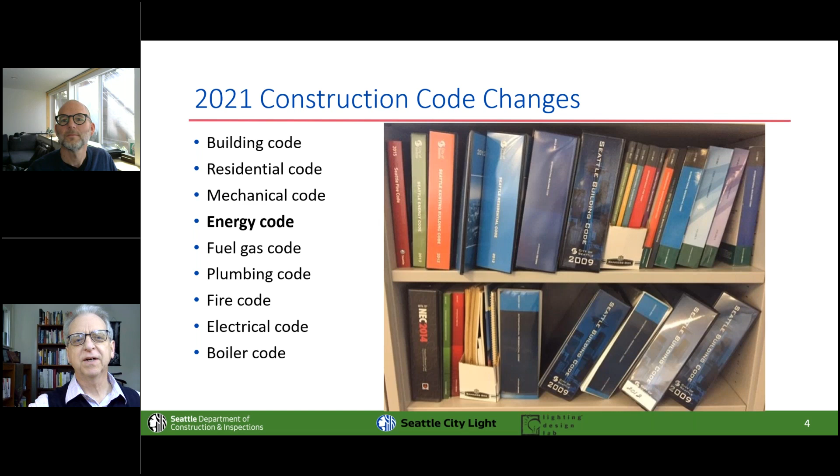Note that this is one of a whole raft of codes for any of you on the call who might be newbies. The energy code's just one of them, and somehow everybody's got to wrestle all these for every project that you do, so let us know if you got ideas about how these all interact.

Just to be clear, we're calling this 2021 - we're perfectly aware that this is 2023. It's the 2021 IECC nationally that this is built on. Then the last couple of years, Washington State spent pulling together its changes. We have like 200 amendments or something like that. We make all but one, I think, which is to make it more stringent.

And then once that's finalized, Seattle picks up and does some more things. We often lead the rest of the state. So things that are in the new Seattle code are likely to find their way into the state and eventually national codes.

The July 1st is the date for everything outside of Seattle. Inside of Seattle, we had been expecting to get to July 1st right up until about 2 weeks ago. Then since it's Seattle and since we can't help but review things to death, we're doing more internal reviews and talking to more stakeholders right now, and so we bumped this to October something. They've just, as specific as they got was no sooner than October 2nd. Part of that just has to do with getting back onto the city council's calendar.

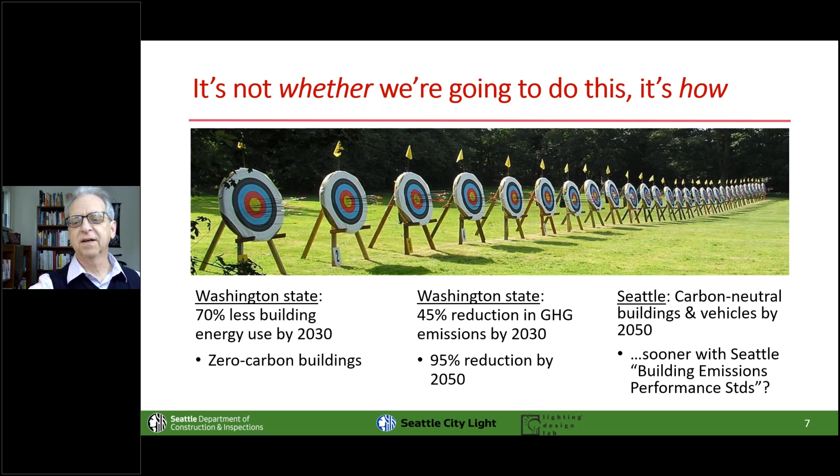The big thing in the lower right there, which we're still working on, is the details for the building emissions performance standards, which will layer on top of the state building performance standards, but being focused on carbon emissions instead of just energy use.

You've also seen this slide, the big four directions we're taking in the development of the Seattle Code today, number one being that the building envelope of any building you're designing now is going to last longer than anybody on the call is going to be alive. We're supposed to be a carbon neutral city in 2050, which might be getting moved up even earlier. So we have to build building envelopes during the 2020s that won't require any major surgery to work in that carbon neutral Seattle.

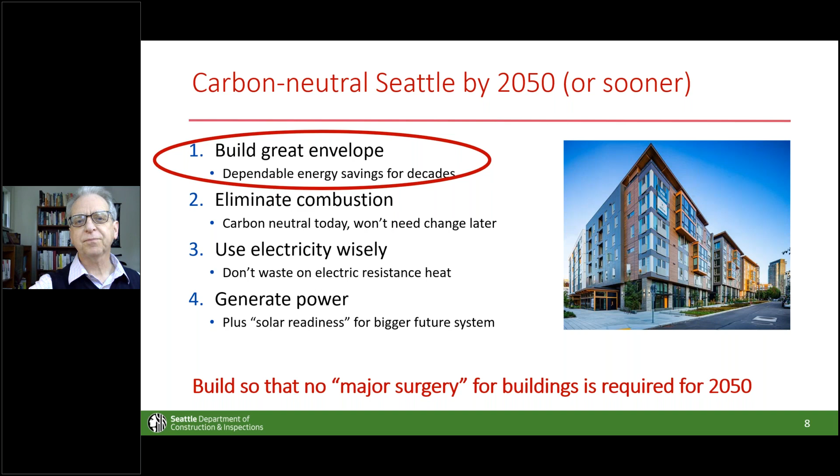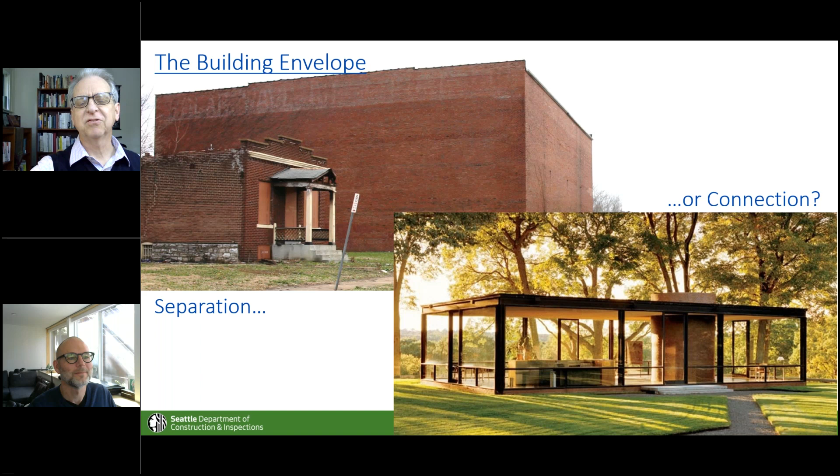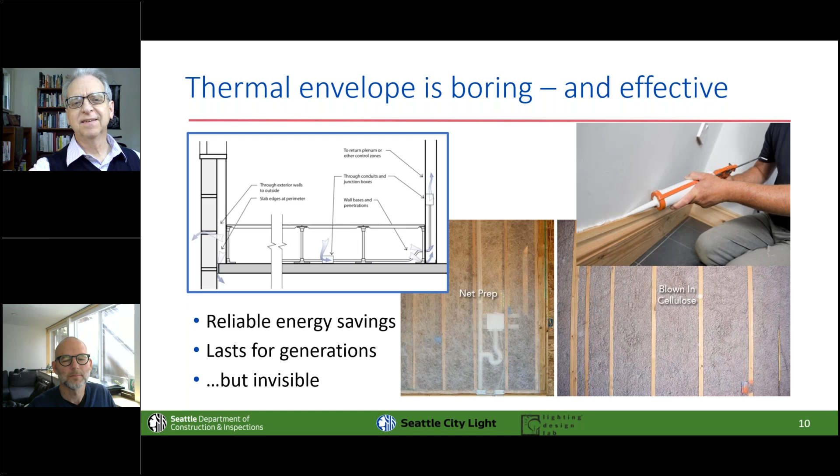We still have a number of high rises downtown from the late 50s and early 60s that are still single glazed, unbroken aluminum curtain wall, and it's been a long time since those went up - it's going to be at least that long that your current envelopes are going to last. It's mostly about how much glazing you have and how it's treated.

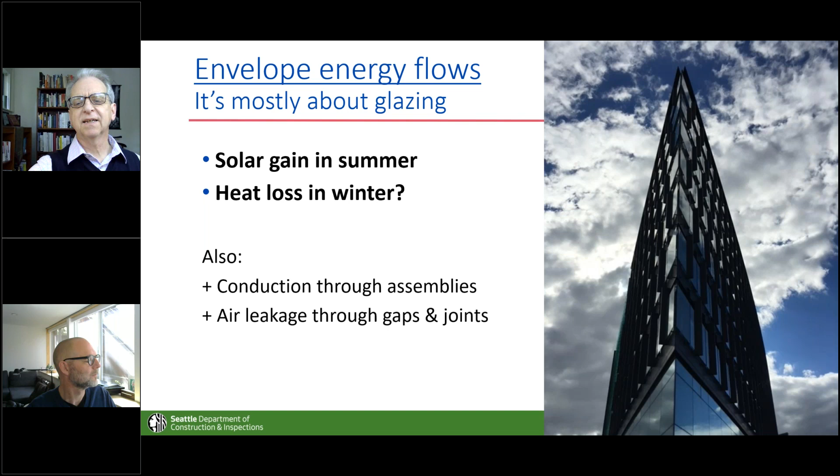Sun coming in and overheating in the summer has got to be dealt with for energy use, and obviously heat loss all winter, and really a lot of our spring and fall as well. Air leakage and conduction are also issues, but really everything gets dominated by glass.

Like I said, our buildings are going to be around for a long time, and so not only make them thermally great, but please make them look good.

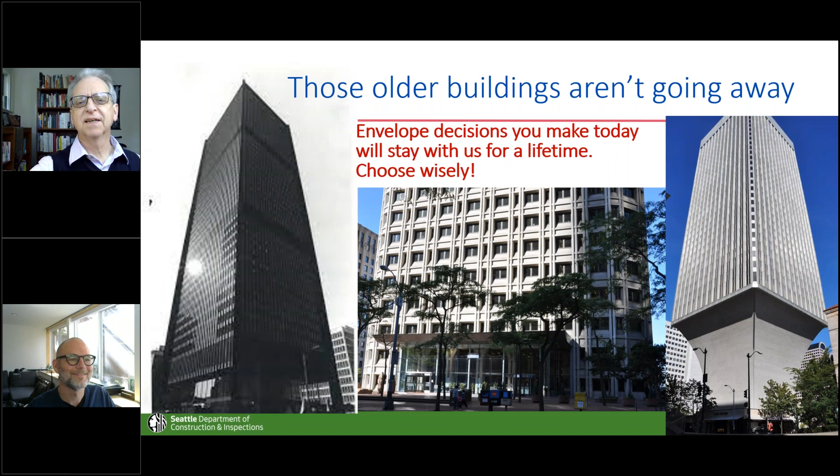We've had now four entire generations of architecture professors drooling over that image on the left from 1922, that all-glass see-through building, and a lot of my architect colleagues just can't get over it. But it might be time to get over it and still find a way to make a stylish building. It's funny that people doing all-glass towers think of themselves as being creative.

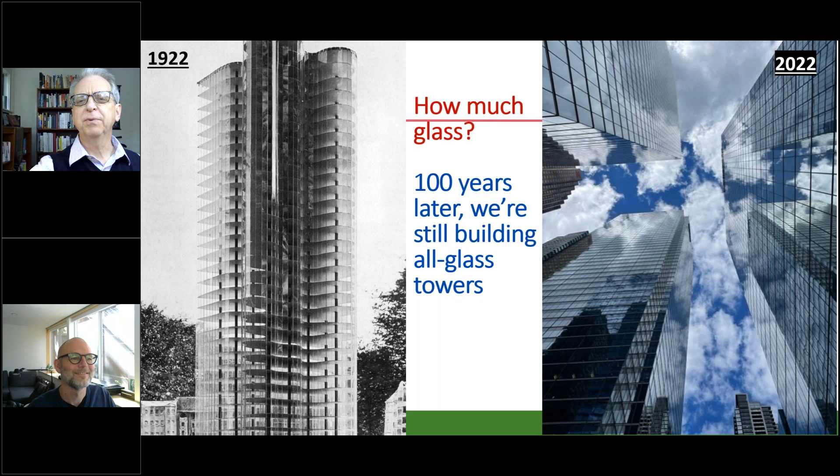By the way, I'm Nick McDaniel. I'm an architect at NBBJ, and I've been fighting or arguing with Duane about energy and architecture for a little over 20 years. So we've got a long history of talking through these issues.

One of the things we're really finding at NBBJ is that the sense of beauty has really moved on from those all-glass buildings. More and more the buildings that we're celebrating and finding celebrated in the architectural community are buildings that aren't all glass, and buildings that express their performance as well. I just put several of the recent NBBJ projects that really celebrate something other than glass, from the thermal TC at Microsoft to Samsung's headquarters to REI's headquarters. These are all projects that really express their performance in the skin. So it's the new beautiful.

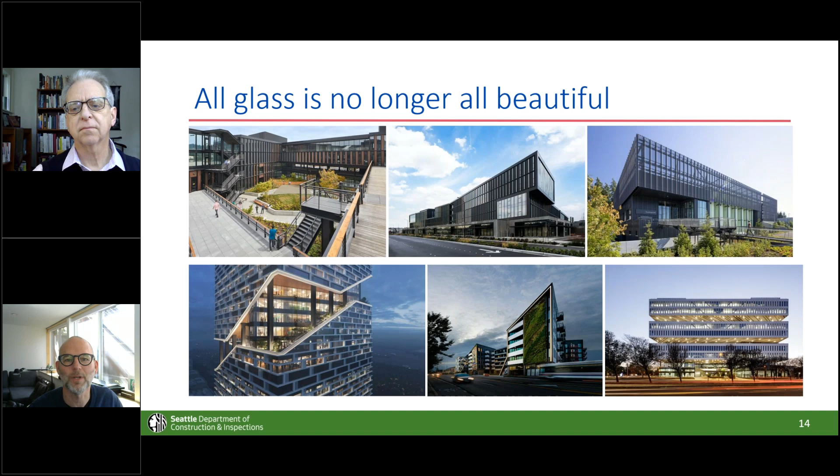This all begs the question: where are we going with this? How good of an envelope is going to be good enough for the long run, and for Seattle to basically be teaching the rest of the country and sometimes the rest of the world how to do it. There's several options I list for how we would come up with this conclusion about how good is good enough.

Is it a cost effectiveness thing? Thermal balance points in the past have been the point at which you have to start heating the building. It's been up around 60 in the past with some of our crummier buildings. It's getting down below 50 now, but we might push further. It's an unanswered question we have to ask about. You could always make a better envelope. Are we going to buy into the whole passive house thing, or is there somewhere else that's going to be more effective?

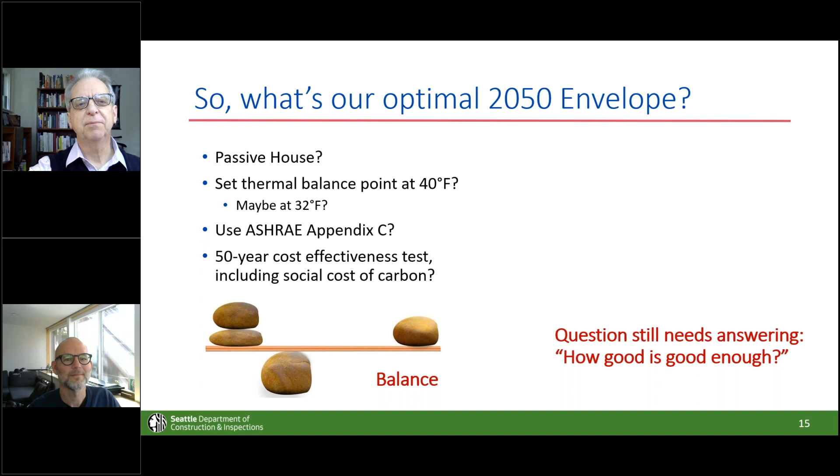Here's my reorganization of Nick's slide. That's awesome, so people can actually read it.

Duane asked me to quickly talk through how we do UA calcs. What's been interesting is the entire time I've been at NBBJ, every year somebody comes up with a better way that's supposed to work to do UA calcs, but we've never been able to figure out a better way. We have to go through the entire building, face by face, surface by surface, through all the plans and elevations, draw the UA for each one, reach out to someone like Arup to calculate the assembly values, and then go through Duane's Excel spreadsheet to figure it all out. It's incredibly time intensive and difficult, and more projects are moving away from it toward meeting the prescriptive calcs instead, as a real way to save money and time.

Nick, what is that little thing in the upper left? Oh, that's a crazy plan - an example of how crazy the plans get as you try to figure out all the different layers in a building and what the different assemblies are as you move through it. It's a real effort, very painful and time consuming, and of course the design changes, and then you do it all over again.

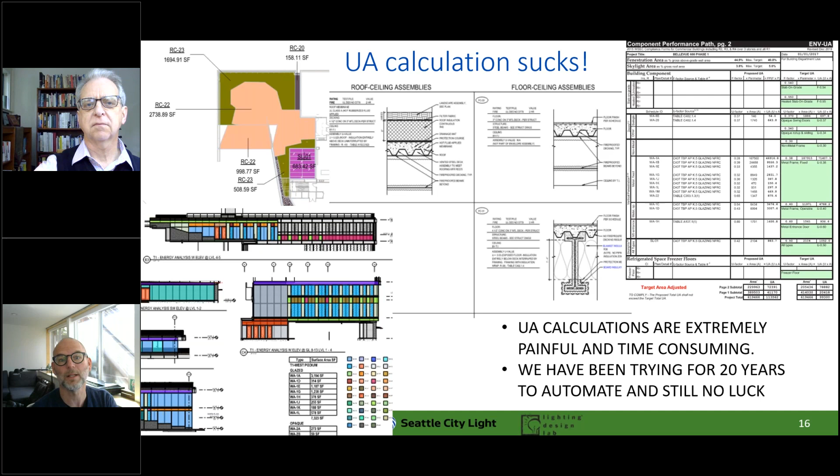You can get an idea - you can see how many assemblies, each color in that bottom chart represents a different assembly on the building. It's really difficult, especially on bigger buildings, and is an enormous time sink in a lot of ways. Well, I'm always happy to waste time.

Getting into the code itself, the maximum allowable area for the state code is the same as always - at baseline code it's just a straight 30%. In Seattle, it was suggested, and we finally bought into this, that we use a variation of the ASHRAE chart with a different target glazing percentage for each building type. So it's different, and you have to look them up in the table.

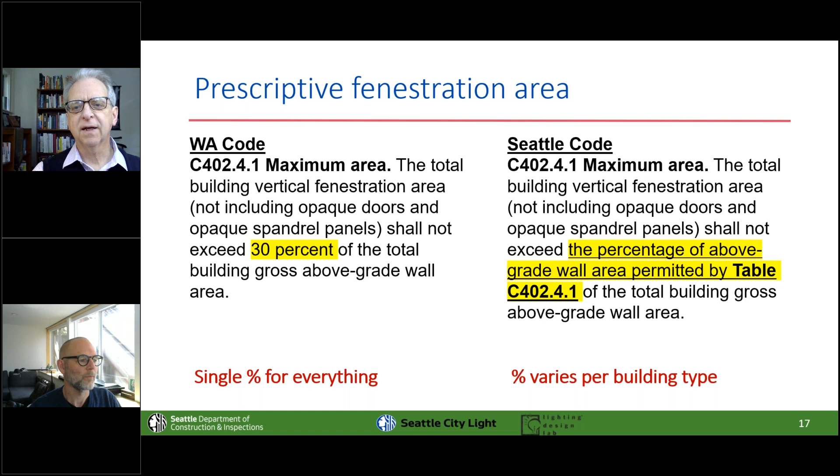There's the table - I highlighted schools there, so that would be 26%. This is after some long back and forth with school design people, who said the ASHRAE chart shows 22%, based on a survey of a lot of schools that was kind of an average. But they said, given the importance of daylighting, it should be 30%. So we settled it halfway. Some of these highlighted in yellow are higher than what's allowed by the ASHRAE standard, and we'll go with those. So just beware if you're an energy modeler that this list is not the one for energy modeling.

With Seattle, you're going to find out in a minute that we require a small percentage of your glazing to be triple or equivalent U-value glazing. You can have, for different building types and occupancy types, different allowable glazing percentages.

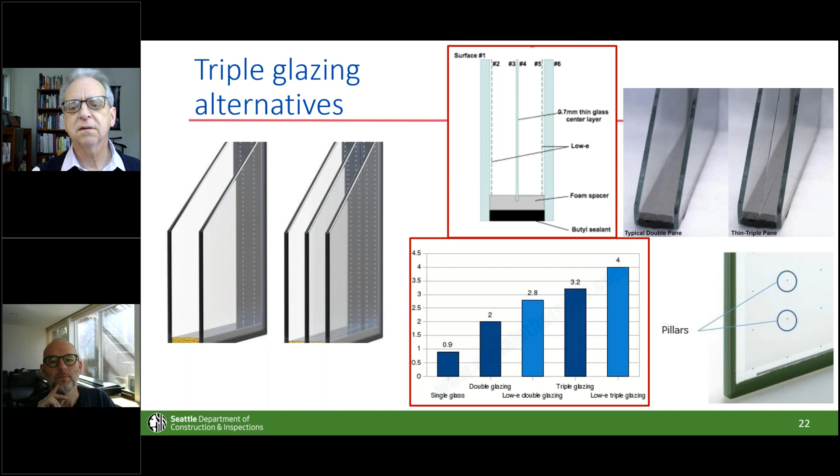So for mixed use buildings, each section of the building would follow its own path. You're talking about, say, you got retail on the bottom, and then you got some office floors and a hotel on the top or whatever. Each sector would follow its own, and if it's a smallish usage - say you have healthcare with a small retail in it or something like that - then the whole floor would just follow the main occupancy type.

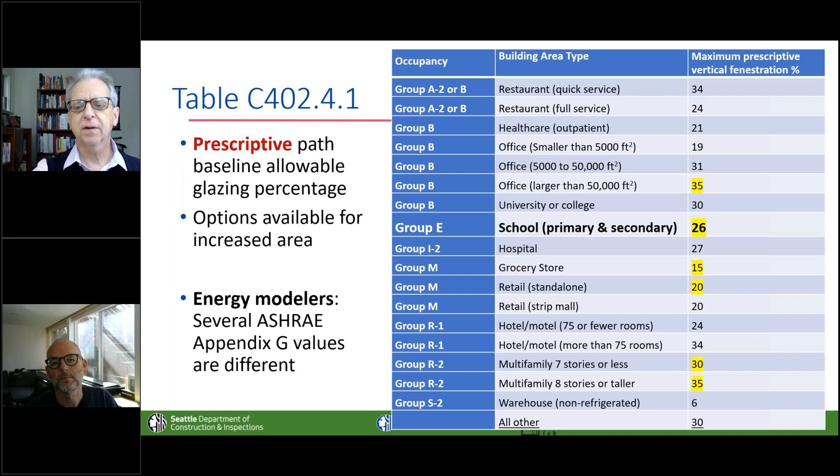So, Duane, part of my job is just to bring in kind of industry costing and reality on things, because I do a lot of square footage in the area. And really what we're finding is that the triple pane is not very cost prohibitive anymore at all.

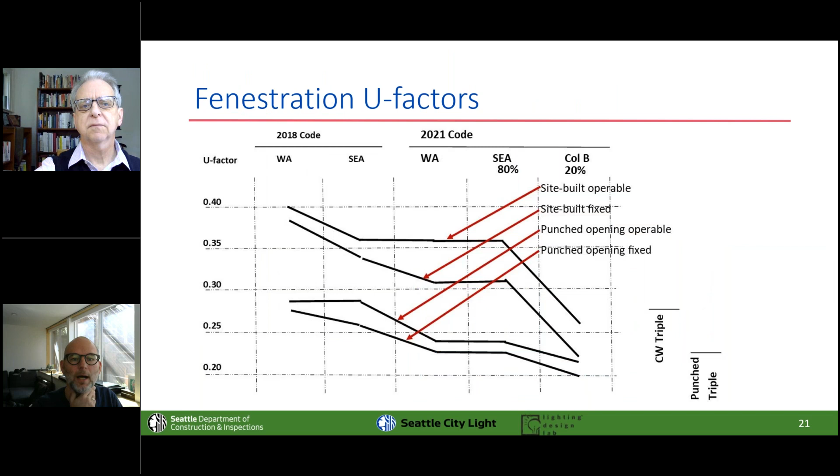The latest numbers we're starting to get are about a 15% premium, and what it does is pretty amazing. With just a super standard, plain Jane curtain wall system, nothing particular special, a triple pane gets down to about a 0.19 U value. Incredibly low, and that's already below that column B standard we set.

If you imagine, it's a very cheap way compared to the kind of amazing things you'd have to do, going to a fiberglass curtain wall or other things, to try to get that kind of drop in U value.

The other thing we're finding is that with triple, you can really craft the glass because you have more surfaces to work with the low E's. You can really refine your glass to get exactly the right daylight-U value balance you're looking for, and do some pretty amazing things. I just put a picture of myself kissing the glass because the glass has been so good on so many projects that I'm incredibly excited about it.

So there you go, there's your explanation, Duane, of why it's there. Thanks, I thought you were just admiring your reflection there. Yeah, there you go, it's so.

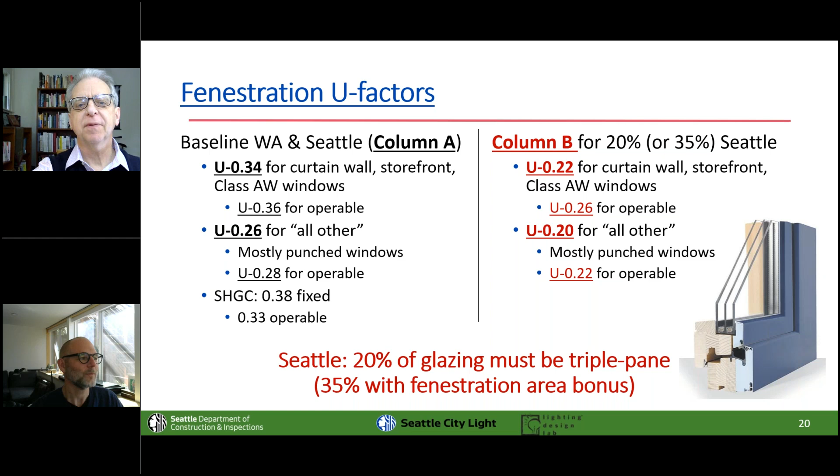You probably saw a few slides back that on that far right column there, we got high performance glazing, that high performance fenestration -- if you just look at the red text on the bottom, that bumps you up to an allowable 40% of glazing for every kind of building outside of Seattle. Inside of Seattle, you have that allowable area from the table plus 15% if you're an R2 apartment or condo building, and the table value plus 10% more if you're any other kind of building.

So you can, and we set these -- if you look at this slide, on the right there's the high performance. You'll notice the column D in there, I call those columns C and D because having another column A and B would have driven everybody crazy. But the far right-hand column, those values are all the same as they are for column B in the regular glazing.

What's different is that the other 80% of glass, we set those values halfway between the triple pane value and the base code value. So if you want to have even more allowable glazing area, the 80% of your glass has got to be that extraordinarily high performance double glass at least.

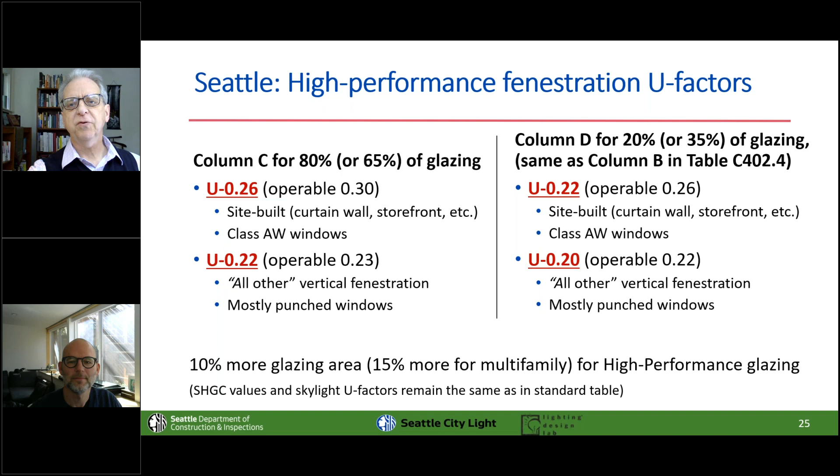Duane wanted me to talk a little bit about how hard this is, and my thought is that especially the 0.26 is really within reach right now with a double glaze, just a simple double glaze with low E. We were able, NFRC tested, to get down to a 0.28 on a recent project I just did with just a number 2 and a number 4 low E. If you're careful and judicious about picking your glass and your low E's, and have some reasonable thermal breaks in a pretty normal curtain wall system, you can get pretty close to this already. I would think you could get down there with just some simple additions and changes. So this is not hard, this is not hard to get to.

Nick, what kind of values would you get if you were doing silicone glaze instead of having an exterior cap? Well, in this case, this is silicone glazed. So I think it's important to say that this is a butt glaze system right now with a number 2 and number 4 low E.

The cap adds a bit, right -- 0.02, 0.03. So I think you want to look really hard at whether or not you want to add those caps to your system, because a lot of times a butt glaze can be a really beautiful look. There's ways to break the caps so they're separated if you want fins or other things. But if you just think hard and look at this hard, you can really cut down on that thermal bridging and get there with really standard systems, standard curtain wall systems.

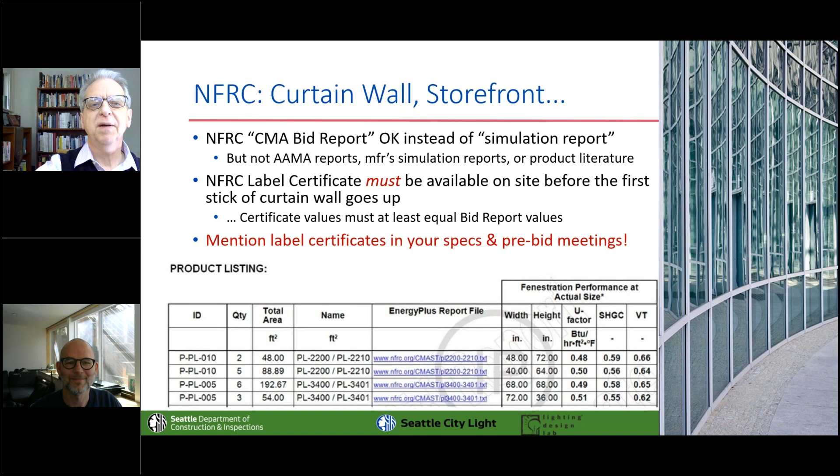There's been a lot of misunderstandings. Obviously the worst possible thing is that you get something up on the building and then it's over the allowable energy flow, and you're going to have to do something to make up for that. So just word to the wise, make sure you get that label certificate early. There's no reason for them to delay.

Well, I'm really going to continue on that theme. Recently I had a project really far down the road in design where they did the simulation and we met energy code, and then they did the physical test and they didn't meet their simulation. So suddenly we were looking at worse U values, or higher U values, than we had done, and had to do a bunch of redesign, really late in the process.

So a couple warnings about NFRC that sometimes people don't realize is that it is a set size - always the same square size of the testing that they do, with the one vertical in the middle. So this is what a typical curtain wall would look like on the NFRC, but on the right is what the actual design was. What happens a lot of times is that the U value of your building skin is going to perform better in reality than your NFRC, because of that size and mullion breakup - there's frequently a lot more mullion and metal in the system than you really will have.

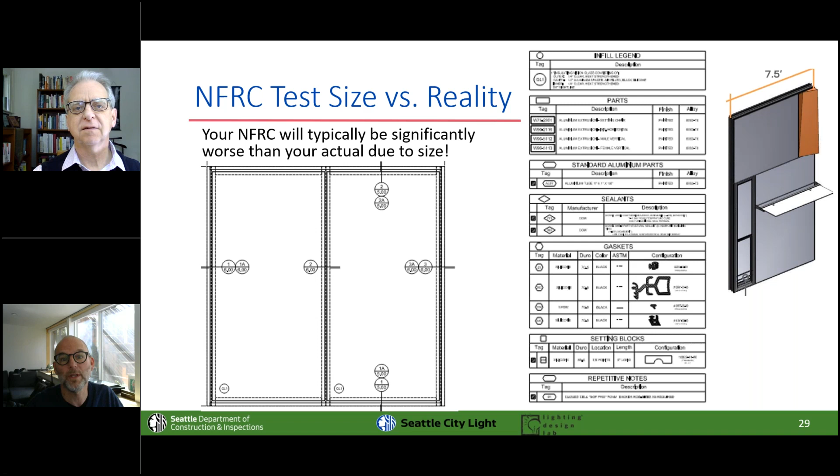I guess the other could be true too - if you had tons of little tiny squares and lots of metal in your system, you might do better on the NFRC. But it's important to know these NFRCs are hard, they take a long time. You need them in early so that you can understand the energy of your building, and so that you can design your building and not redesign it multiple times in the process.

Cool. And if you're doing punched windows, it's a lot simpler - you just have the sticker there.

There are a bunch of values that some people find in Chapter 3 for various kinds of windows. Do not use those unless, there's sometimes odd situations where you're reusing salvaged windows or something like that, and you don't have any NFRC test - then you have to use those, but otherwise always go with the label.

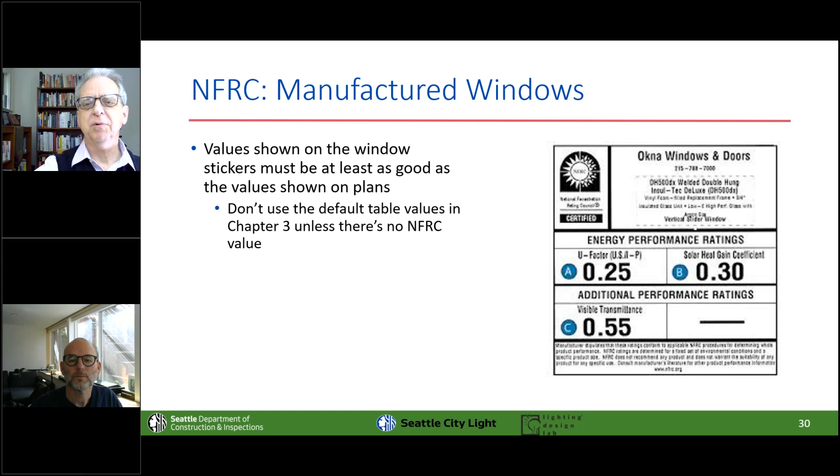This is my little pet peeve. That diagram on the left shows what I'm calling the heat loss superhighway, which is that same stick of aluminum that is out in the warm air inside at the top there. That same piece of aluminum is now down in the spandrel area - it's got an outer face that is completely uninsulated. So you're taking, and aluminum, as you know, is a wonderful conductor of heat, so you've got three sides exposed on the top to absorb heat from your system, and then you've got a great place for it to flow out of the building.

Recently, look on the right there - you can see there's a system with continuous insulation outside of the spandrel and a frame extender by the manufacturer that puts the glass out there with it, and that means that gap for the heat to flow through is gone.

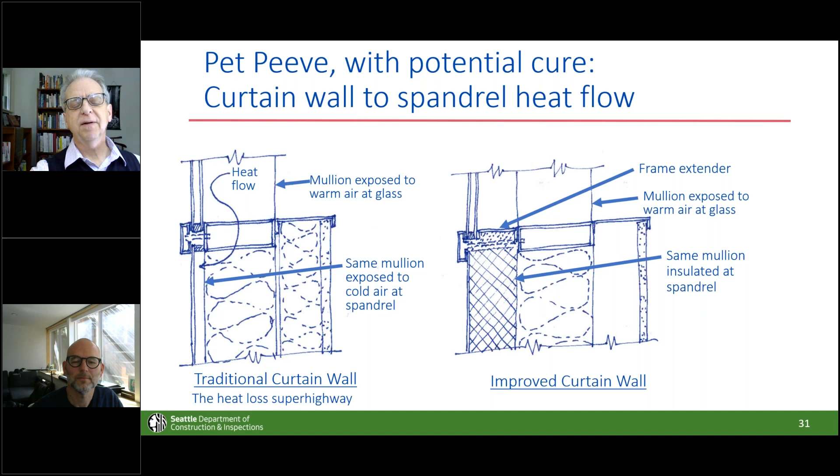Didn't put that in the code this time because there weren't really enough manufacturers doing it, but I see this is coming on, and I could see that's a way around that problem. But otherwise, we've considered the spandrel and the vision glass areas separately, and it looks very innocent, but it doesn't work. And there's this other thing about condensation.

One of the things that's new for us is that curtain walls are not fantastic in terms of their U value. They have those metal superhighways that Duane was talking about. So one of the ways to meet code is to add insulation behind the curtain wall to try and get up to the U values. We've started to frequently put continuous insulation as a layer behind the curtain wall to get the insulation up.

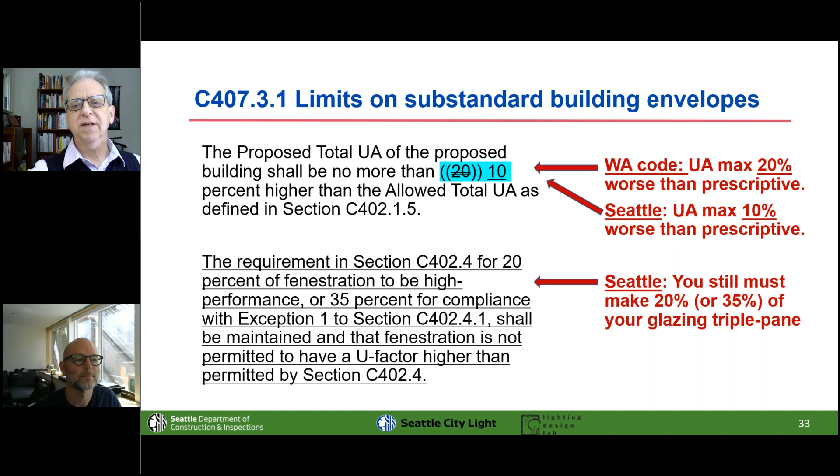And by the way, that bottom piece there clarifies that you can't just use energy modeling to get out of that 20% triple glazing requirement. You still got to have that high performance glazing in your design, even if you're doing energy modeling.

I think this is a great point, Duane, in that this is part of why we're starting to see even some pretty big projects go to prescriptive on the energy code. Because by the time you do all that modeling and do all those UA calcs I was talking about before, you're going to have to really see some amazing benefits from that for it to make sense.

So yeah, you could make your building a lot worse, and that made owners happy. There used to be a lot of benefits you got out of it, and now it's like, well, I don't know if you're getting quite so much.

So this was just a thought about windows. At least for now, they're getting better, as Duane pointed out, but transparent glazing is bad. Compared to solid wall, it's tremendously more conductive, at least with the best technologies we have now, in the 10 times kind of area. So really thinking about where you put your glass is becoming more and more important. And this goes along the vein I was talking about: less and less glass on buildings, and really enjoying buildings that show their performance.

In this example, the building has done everything it can to get a 10'6" window head height, a very high window head height to get the daylight autonomy we want. That's what you need to drive daylight deep into these buildings. But you don't need it in a ribbon all the way across the building. If you add vertical solids between each of the windows, even on a high rise, it makes a tremendous difference in energy efficiency, and also allows you to get that great daylight autonomy you're looking for. So we can have both. You just can't plaster glass everywhere anymore.

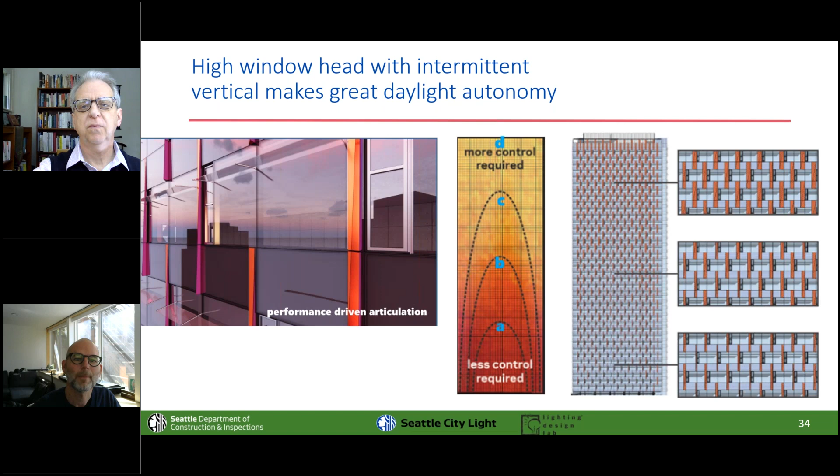You have to have a vestibule for those doors next to your revolving doors. I did a little informal survey once, and it's somewhere around 40% of the people in a few buildings I looked at were going through the swing doors instead of the revolving. If you really don't want this, air curtains are a possibility instead - they're quite effective if you follow the rules. But we have the 3,000 square foot rule, so if you're doing a little coffee house that doesn't need a vestibule, a vestibule would obviously be a large proportion of the entire floor plate. If it's just an emergency exit, or the way from your restaurant to the outdoor patio, those are all exempt.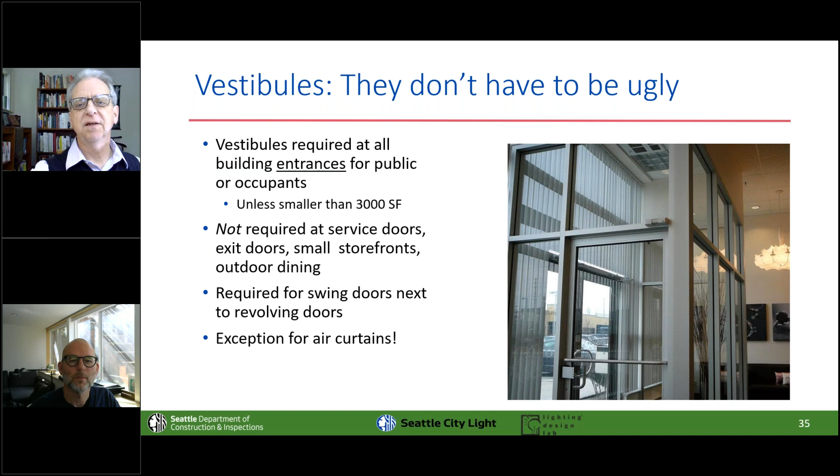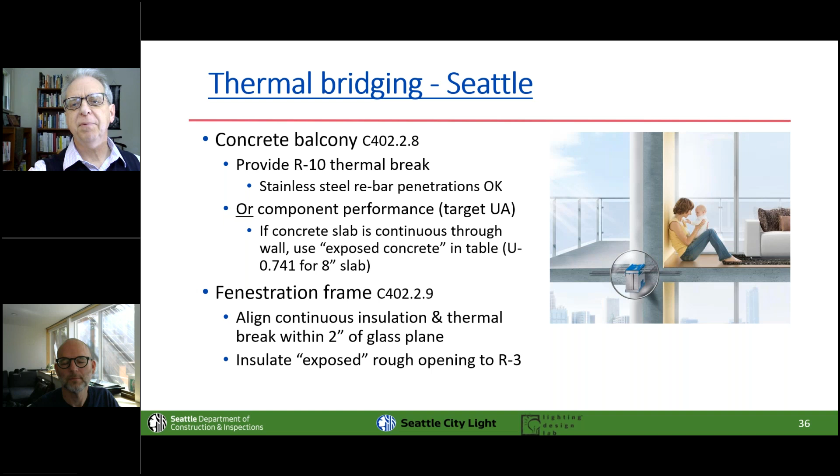We have a couple thermal bridging standards in - one regarding cantilevered concrete balconies and another for fenestration. This is in the current code and will continue into the new code. These have been big pathways for heat to get out of buildings. We've set this up so that, as I've highlighted, you can use one of those commercial systems that has an R10 thermal break. You can see in the middle of that upper photo, and that can have stainless steel reinforcing running through it.

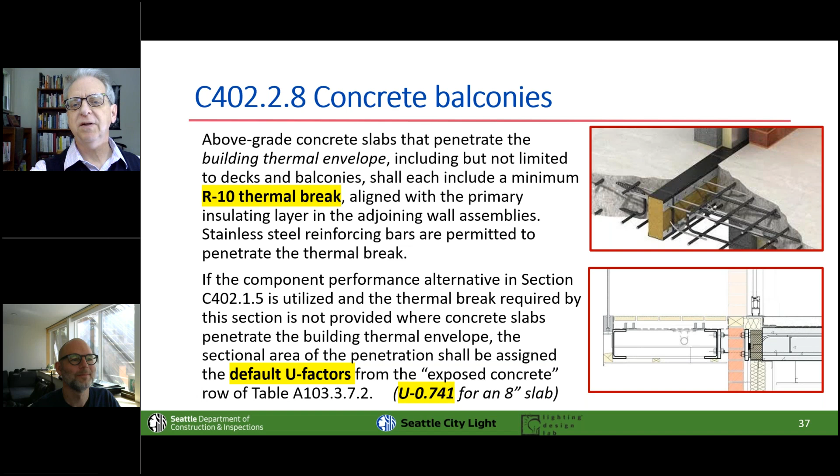But if you want to use a regular cantilevered slab, you have to go back and use that value from the tables in the back for uninsulated concrete walls, and that is 0.74 as opposed to a 0.05 that you'd have for a typical wall assembly. So it's a big penalty.

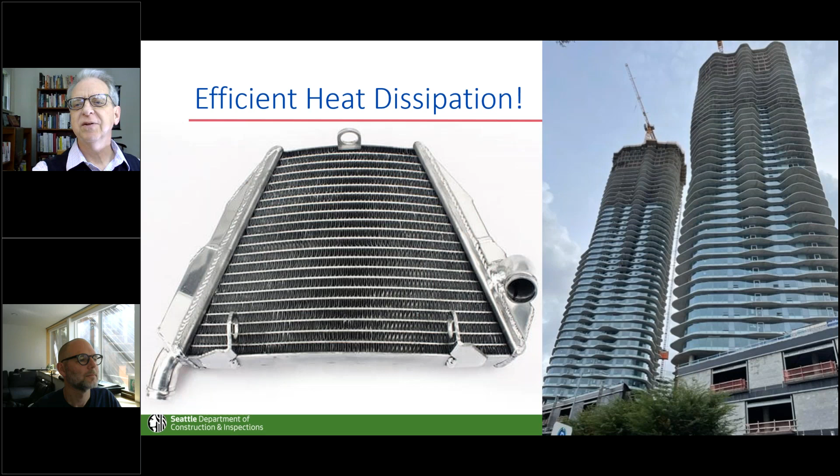I did do a tour of balconies around town in several neighborhoods, looked at a few dozen buildings, and remarkably, since this code change, I only saw like 1 or 2% of balconies being cantilevered concrete. The rest, in order to deal with this rule, use various kinds of clip-on balcony systems you can buy, or they're recessed so you don't have to cantilever, or they have angled braces used in places that pick them up. There's a lot of options there, but here's an example of a code requirement changing construction practice, and people that want balconies can still have them.

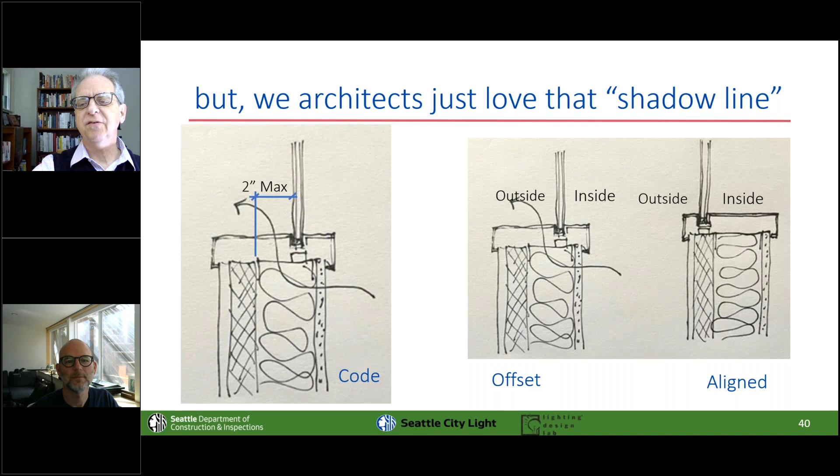If you've spent a lot of time around architects, you know the idea of having the shadow line gets people all tingly, and you've got to be aware that shadow line comes with some kind of cost. There might be a technical way to work around it if you really wanted, but the code says no—you've got to hug those in close together. The glass and the thermal break in the framing system need to align somewhere near the continuous insulation.

I'm going to just skip by this, and we might come back and have a break in a little bit. I wonder, it said Duane, on the questions—we were going to answer questions at break. There's a bunch of them. Well, yeah, okay, let's take advantage of that then.

So going back to U-values, Cameron is curious what you guys think the max—realistically achievable U-value would be, if, as you're saying, U26 is relatively easy.

What do you think, Nick? I guess the question would be max U-value with double pane, or—you know, what's the minimum? I guess probably minimum value is the question. Right now with the technology as it is, with a double pane window with argon, I'd say about 0.25 is about as far as you could possibly get until you go to something much more extreme. That's just my gut.

Talking about a curtain wall system? Curtain wall, I'm talking about an aluminum curtain wall system, double pane, low-E number 2, number 4, argon, super spacers, and then some kind of reasonable thermal break on the curtain wall itself in the system. That's about butt-glazed—sorry, there's a lot of caveats. But that's about as far as I could see you going with a straight system. Obviously once you go to triple pane, you can get it quite a bit lower than that.

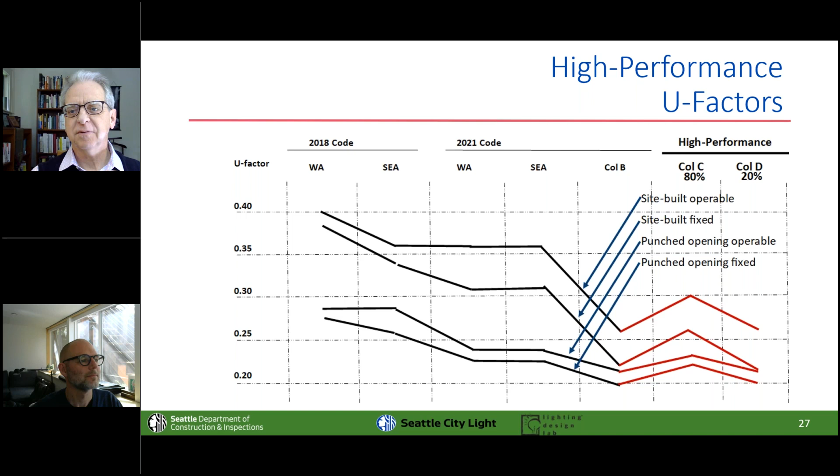That's the hard thing about having questions in the chat, is we don't get to have a back and forth. But the next question was asking about the 15% premium for triple pane—is it across the board, or just in specific categories?

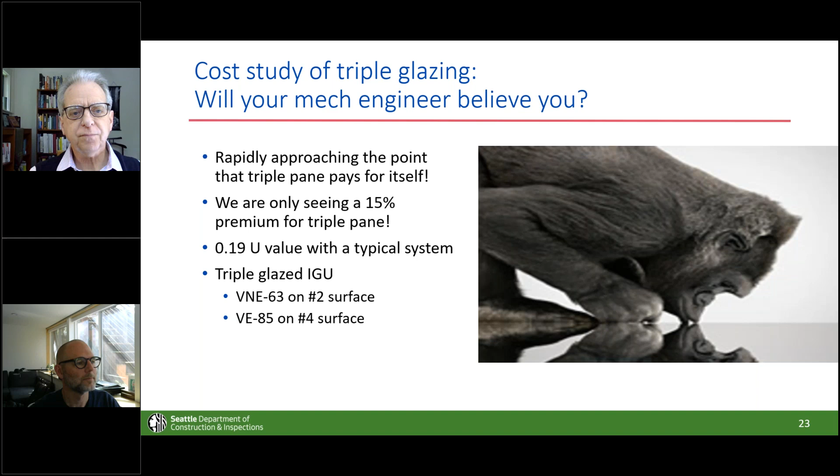Great, that's it for now. All right, somebody just added one last one. I don't know if you want to hit that, Duane.

Go ahead. It just says, what will happen with existing buildings undergoing a major renovation that will require meeting the current code? Does the envelope need to meet the new code requirements?

The overall performance of the building would need to meet the energy code requirements minus 10%. I think we were talking about a substantial alteration, right? So you're doing a complete gut and rehab, or you're changing the use of the building or something major like that. And we recognize that there are a lot of things about an existing building. You're not going to be able to insulate the slab edges, right? I mean, come on, some other things. So we accommodate that with our little 10% thing. But no, for those kind of projects, we're treating them as though they're a new building, not just for energy, but seismic and life safety and some other things. And then we back off somewhat, based on the reality of that situation. So you may indeed need to get up to speed.

Notice that we have rules coming into play statewide and in Seattle for building performance standards, which are going to start kicking in over the next several years. Existing buildings that aren't doing any renovation at all are going to be required to meet those standards. They're not as rigorous as the new code, but some of our older single-glazed, funky buildings with enormous heating and cooling energy use are going to need serious upgrades, whether to the envelope, the mechanical systems, or some combination, up to the design team.

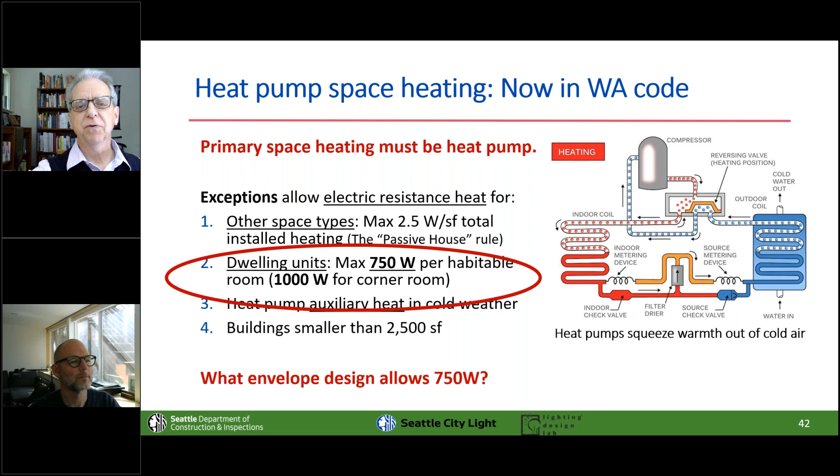Here's a mechanical slide, and the reason I have it here is that we have this requirement for heat pump heating, and then in apartment buildings you could have 750 watts of electric resistance per room. The question is, if that saves you from having little heat pumps all over the building, what does that need? We had a similar lecture last year, and RDH helped out, looking at last year's code and how this would work.

They found you can have normal glazing for an apartment and still work within that 750 watts pretty conveniently, and now that our U-values are even tighter, you'll have an easier time meeting that than ever. For a large corner room in a curtain-wall type building, it's more difficult, but you could do it with better U-value glass. Lucky for us, we have better U-value glass built into the code, so for certain challenging areas you might select those for which portions of the building get the 20% triple glazing.

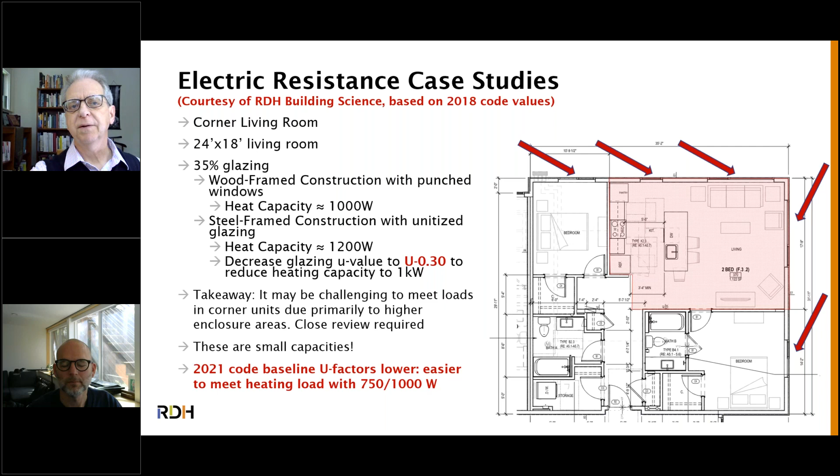We also found that for even medium-height buildings in cold weather, this made the ventilation work in reverse due to stack effect. The top half of the building was actually having air flow from the core of the building, under the entry door, and out through the trickle vents. So now you have to mechanically deliver ventilating air to each habitable space, and have heat recovery on the exhaust.

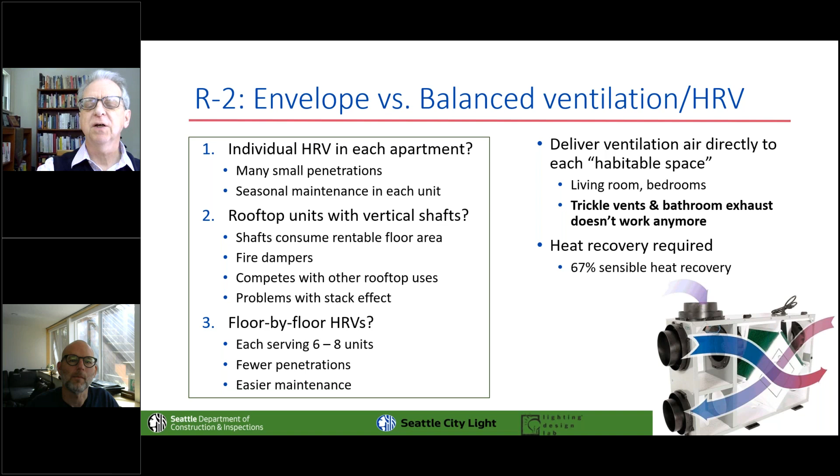The maintenance would happen out in the corridor, so you didn't have to invade the apartment. That might be the way to go, but you can see how that impacts your envelope, the number of holes that you have to do and where you have options to make those happen.

Another thing that's in the current code for Seattle, and now has gone into the Washington code, is about PTACs. If you've ever stayed overnight in a cheap motel and had one of those things that made a big roaring noise every time it started and stopped, that's a PTAC or PTHP. They're enormously leaky because they have to be removable, sliding in and out of that sleeve, and they themselves have a very poor U value. So we've said you have to basically treat that as though it was a piece of single pane glass, and make everything else work with it.

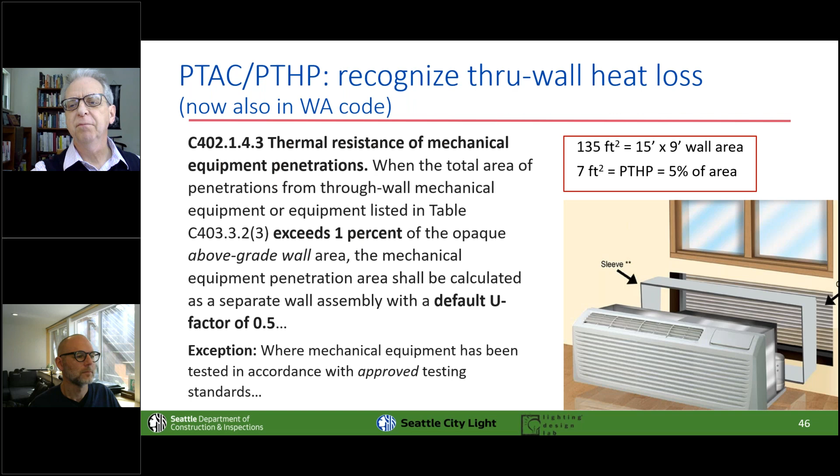We also have other things in the mechanical room, just in the mechanical part of the energy code, discouraging their use, because most of them are very inefficient. So we're moving away from that. People love them because they're cheap and easy, but that's too bad.

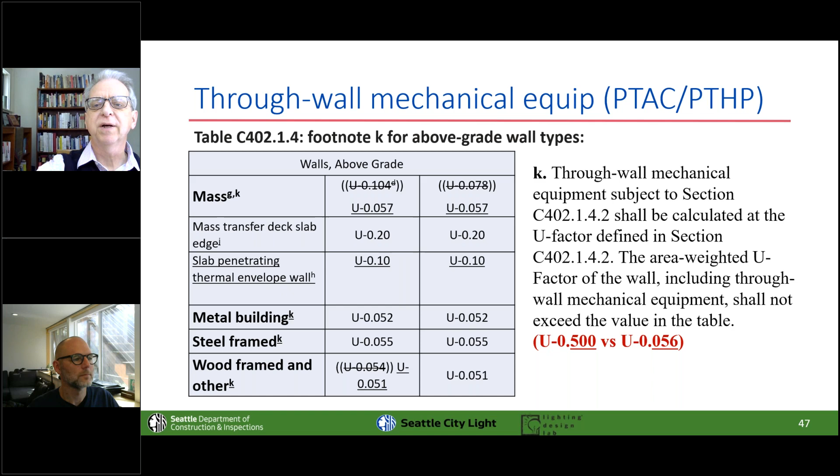So we dealt with that with a footnote in this table that clarifies you have to calculate your wall with that area at 0.50 instead of 0.05 - so 9 to 10 times the heat loss through there.

And we agreed that you would not need insulation directly above the electric utility vault, to get around some difficult construction problems.

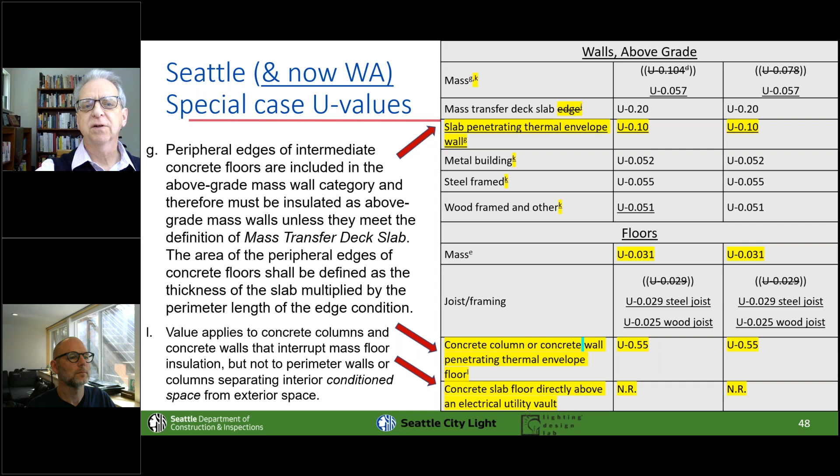Air barrier testing - the big deal is that it is mandatory now, and the test standard is 0.25. It's been 0.40 in the past, and this one kind of surprised me, but the State Building Code Council said no, we're going for 0.25.

We have discovered that buildings that have hired an actual building science firm - there are several great ones in the Seattle area - to help with their facade design and supervise construction, always pass these tests with flying colors. The ones who fail have typically been people who have not hired a consultant and have been doing little 5-over-2 buildings or something.

So take it seriously. They give you two options: either you test the whole building, or you test a selection of stories, plus a quarter of the above grade walls. I'm not sure why that got in there, but I think it's going to be simpler for just about everybody to test everything at once.

We do have procedures in place for buildings over 20 stories that you can't really test all in one go, and for multi-tenant buildings. So give us a call.

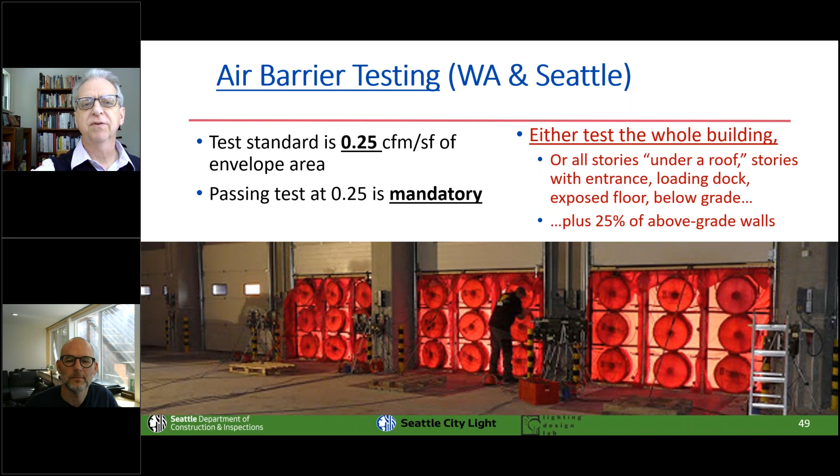The idea is that it used to be you could say, well, you could either have an inspector carefully examine things, or you could test it. But carefully examining things doesn't tell you where the leaks are. And the materials themselves and the assemblies are not a problem - they're well made.

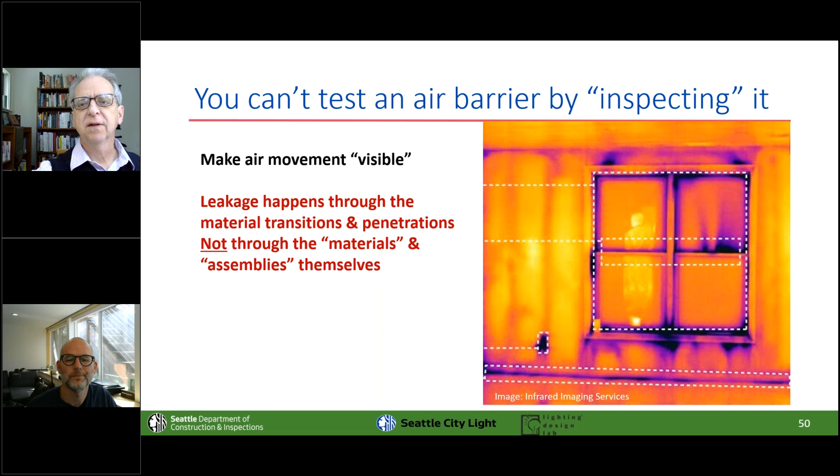It's where one trade bumps into the work of the other trade or cuts through the work of another trade, and that really can leave things with nobody taking responsibility - or the different materials going through thermal expansion cycles at different rates. Those little gaps and holes are just invisible until you turn on that pressurization fan.

I did a study several years ago about how this has all been working out, and interviewed several people in the industry at length. Some of the advice they have for the design team - the first one, like I just mentioned, is hire yourself a consultant.

It might be that you only need to do that for a couple of buildings, and then you see what the details need to be and take it on yourself, but don't go cheap there. Really, have a heart to heart with your insurer and see if they agree. A lot of places are still using sheets of typical details and specs that were created at the dawn of the computer age and are still in use. Definitely look at those and bring them up to date to make sure your contract documents defend you.

Notice that you can save money if you can talk your mechanical engineer into believing you, which is sometimes a challenge, that they don't have to leave this large allowance for replacing air leakage. That can downsize the equipment and the ducts in a really significant way. And if your mechanical engineer is not interested in that, find a new mechanical engineer.

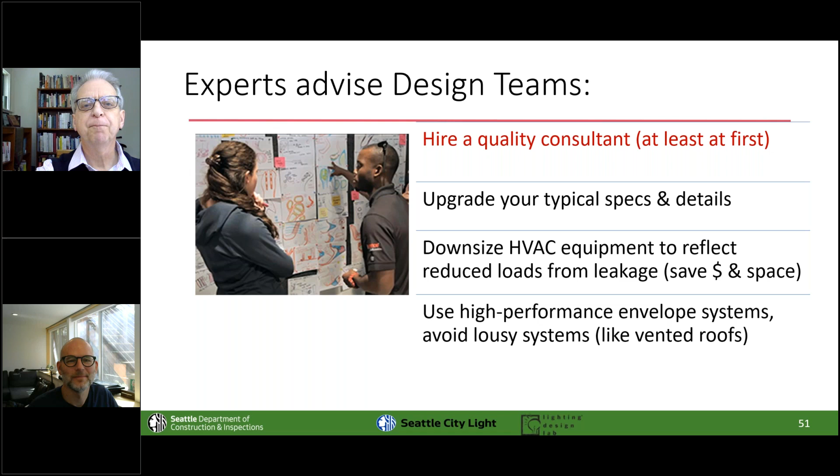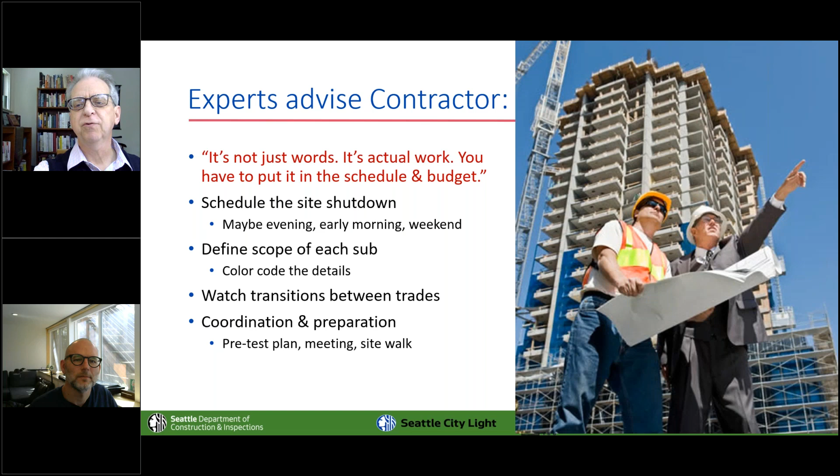This whole testing thing, the good contractors are already on top of that. They have specialists that ride herd on everybody and make sure there's schedule for it and everything. But especially when you've got design teams and contractors from out of town that are not used to this, you've got to be really careful, and it takes a lot of upfront preparation and meetings to make it run smoothly.

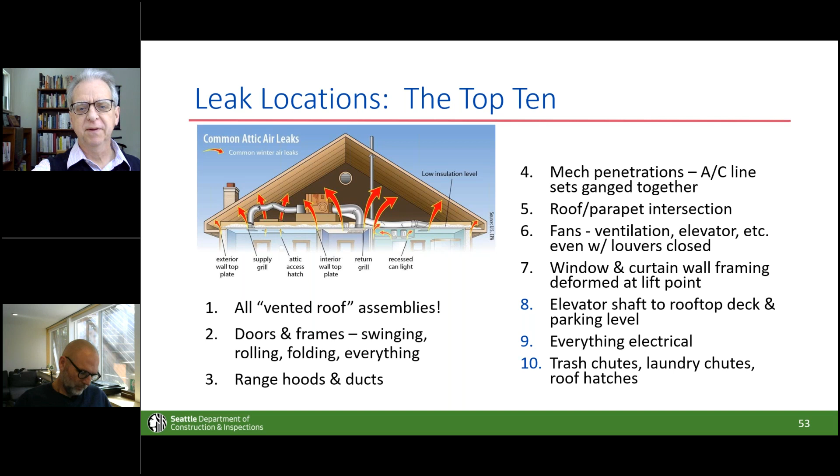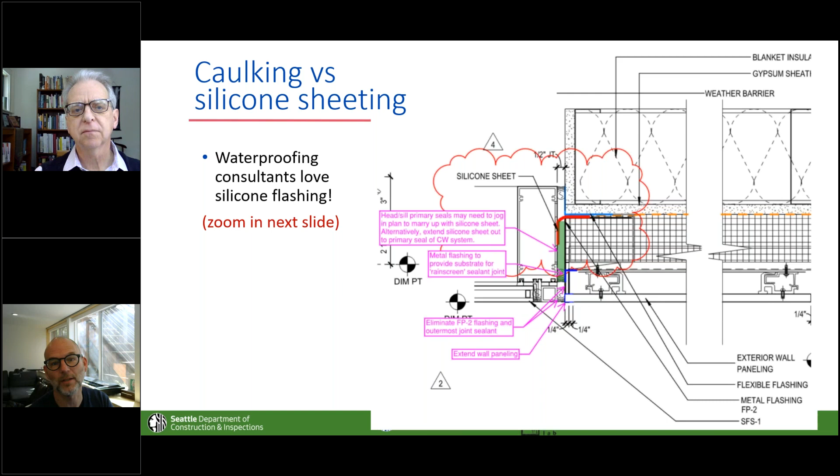Yeah, well, a couple things. I really like to encourage architects that air barrier testing is your friend, and to really think of it that way, because like Duane said, some of these leaks are so small it's almost impossible to find them visually. One thing to be aware of is a lot of times those places where air is getting out in the pressure test are places where water can get in when the building's operational. So you really, really want to think carefully.

So a couple thoughts per Duane's point about the same old details you've had since the beginning of time. One of the things we've really discovered is that nobody is looking at paper drawings anymore in the field. We used to do everything in black and white on all our details, and when that came to waterproofing, they were impossible to read. You'd have 12 different black and white lines with different dots and dashes to try to convey all these different systems. What we've really discovered is that just adding a little bit of color to a drawing can make a tremendous difference for people to be able to read and understand the different layers happening in terms of your waterproofing. So really encourage people to think about that.

The second thing, I just put a clip from a project I was working on of the comments from those waterproofing consultants. You really want these consultants - somebody like Arup, or RWDI, or Fourier - they'll not only look at your details and help you understand them, but they'll also go out to the field and catch things that you wouldn't catch yourself. The first most important thing for most architects, at least, is to make sure that things don't leak. So this is a quick example.

One of the things you'll find with those consultants is they really like silicone sheeting. They're not as fond of caulking, and the reason is that the silicone sheeting is continuous and isn't nearly as prone to mistakes in the field, and also doesn't degrade as quickly over time. The second thing is that a lot of their comments involve looking at things three-dimensionally - looking at that detail and thinking about what happens top and bottom when that waterproofing turns a corner or gets to a window frame. They're incredibly good at finding those problems and really helping you understand where they are.

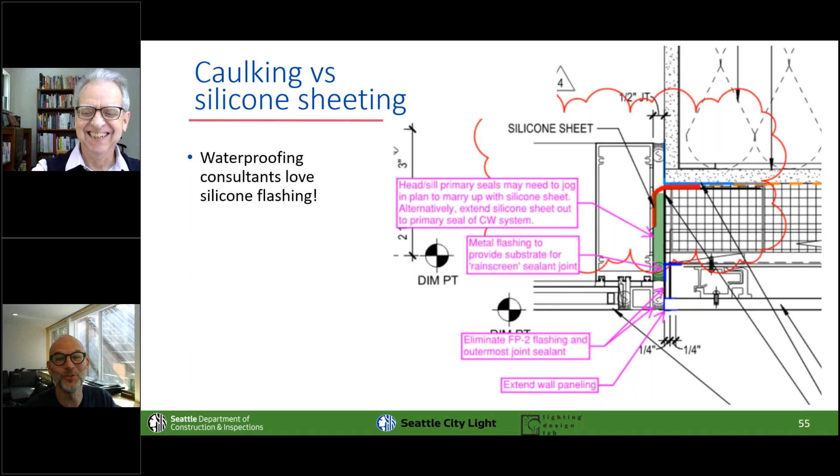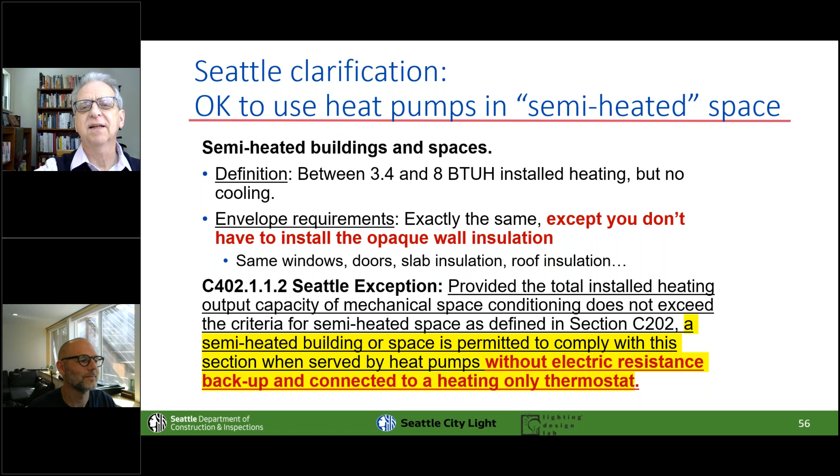Here's a little one for you. Semi-heated spaces—people are always angling for this designation—are places that have some heating but not much. The only difference it makes in your building envelope requirements is that you don't have to do insulation for the opaque walls. Everything else, the windows, the slab edges, that all has to comply with code, because over time people will just move in a different function there and say, well, we need some heat here, and move it up. What you see highlighted at the bottom is that we've made it clear heat pumps are allowable as the heat source for those semi-heated spaces. It might be like a big retail outfit with a garden store on the side that isn't heated like the rest of the building—that's the kind of thing that works as semi-heated.

With envelope quality, I've heard from a lot of experts in the field that the big thing is continuity first—you just have to really understand in three dimensions where that inside air is separated from the outside air, and whether it's all done in a way that's going to last for 50 or 100 years. Working it out in elevation or even in section doesn't do it. You really need to look at how the corners of things come together.

You've got to have communication early on. I've seen people with the plans up on a screen where the general was highlighting each thing with all the subs present, like who does this sealant and who finishes that gap. Those are important things to get worked out, and it just takes time up front. And then you've got to watch it the whole time. And remember, you've got that air barrier test, and you really, really have to pass.

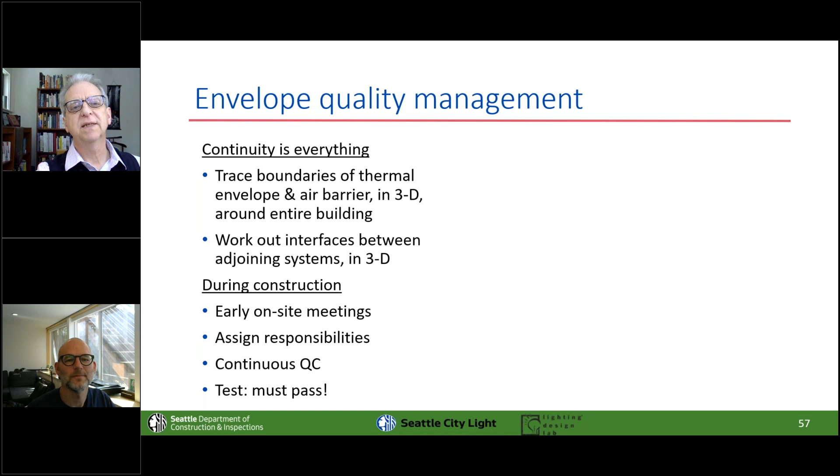So this is exactly per what Duane is talking about. One of the things we discovered at MBJ was that a lot of the junior architects, people straight out of school or relatively recent into architecture, actually had no idea where the outside of the building was or the inside, and where that line went. As you get into more complicated assemblies, that can really be problematic—or several people on the team might have different thoughts about where that air barrier line is.

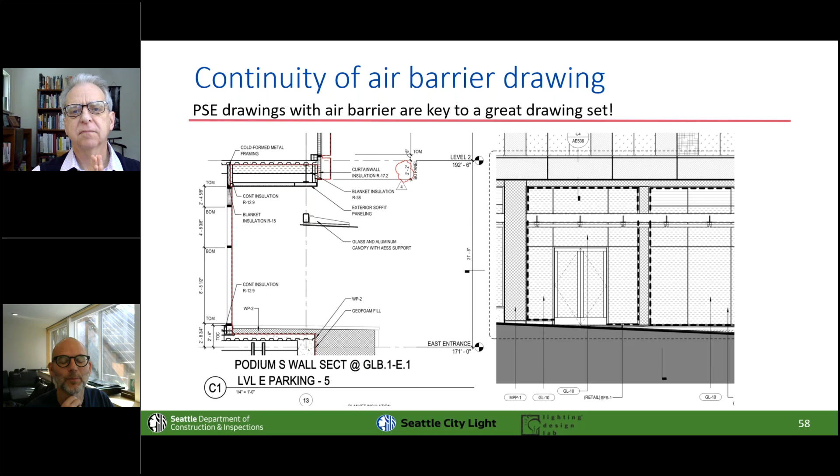So one of the things—we're a little old fashioned, it's not 3D—but we do plan, section, and elevation drawings a lot on all of our buildings as a way to understand them. One thing we've started doing with our teams is asking that all the plan section elevations have a red dashed line running through the drawings that shows where that air barrier is, because it's really complicated, especially with rain screens or different assemblies. You need your whole team agreeing and understanding exactly where that line is. So I really encourage you to add that line because it'll tell you a lot. And you could use color to make that stand out.

Note that we've bumped up the requirement for renewable energy, which of course on buildings just means solar. At the state level, it's half a watt per square foot. For Seattle, it'll be three-quarters of a watt per square foot of conditioned area for all the floors of your building.

And then there's additional renewable energy in the C406 additional efficiency credits table. Once you've paid for a small system, the incremental cost to increase the size is much smaller than what you paid for that first section of the system, so you might look at that as an economical way to get credits.

Along with actual solar on the roof, you have to get solar readiness set up on at least 40% of the net roof area. The net roof area as defined in the code is the gross minus planted areas, occupied roof decks, mechanical equipment, service area for the mechanical equipment, and skylights. So you take that net area and at least 40% has got to be ready for solar, and you might even want to consider making all of that net area ready for solar, because then you'd be set for the future.

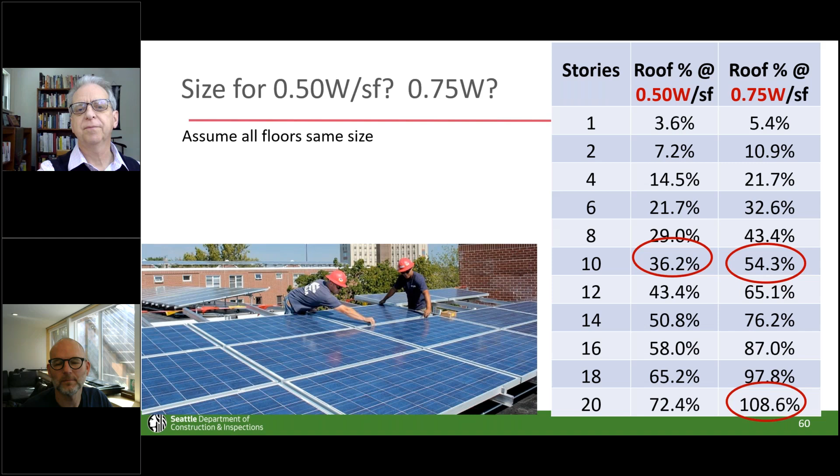You basically have to decide between ballasted systems and mechanically attached ones, and they have pluses and minuses. The ballasted system is going to weigh a little more, which might get your structural engineer's attention, but it's got way fewer actual penetrations through the roof. They have these concrete blocks that fit into a little slot, and it kind of works. I've heard advice that it would still move in very heavy winds, so you want to get it all restrained back up on the windward side for when you get your heavy winter winds, which for us would be the south.

But if you're doing new building, you might want to look at the mechanically attached option. There's more penetrations, but if it's new construction, the solar installers can work with the roofers and have that all done at one point. It gives you the option to have a little higher tilt on the panels. If you want to go that direction, just talk to your structural engineer about wind issues.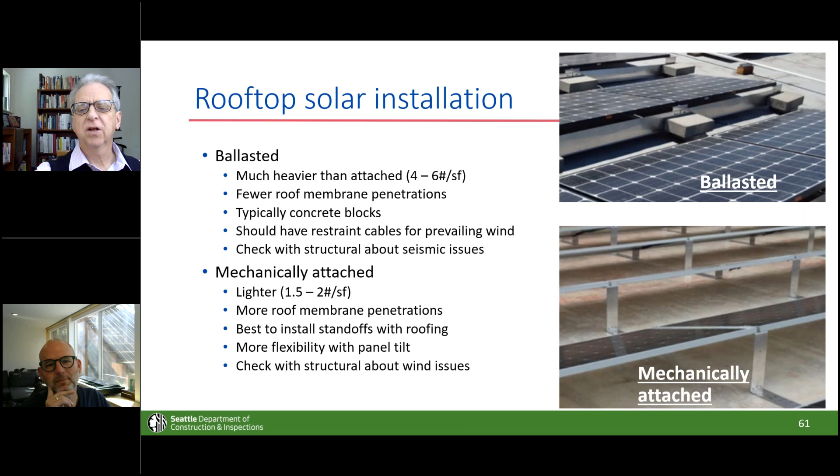There's this really cool company in Switzerland that makes panels that look really nice, in 30 different colors, that have been tested for 20-year aging and all that, and look just like wall panels while being fully functioning solar panels. They cost a fortune, but they might not cost a fortune forever.

For those, our rooftop systems work really great for a day like this, when the sun is high in the sky and you get a good angle. But when you really want solar, it would be in the winter or in the early and late parts of the day, and that's where a wall assembly would work. So keep that in mind.

There's also, as you see on the left, systems out for use as balconies.

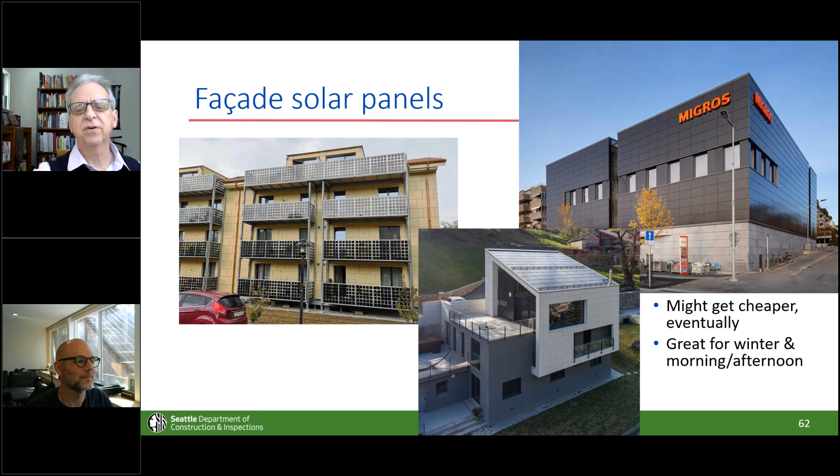I mentioned the C406 additional efficiency credits. You can see there the requirements for Seattle are 10% higher than the requirements for the rest of the state in terms of the number of credits.

If you're used to the old system, don't panic by seeing these numbers. It's a different system, like a stock split of 6-to-1. They basically made each one of the old credits worth approximately 6 of the new credits, but this is much more scientifically worked out at a national level now.

This whole thing started here in Washington State and has made it into the national codes. But see where I've got it circled in blue there, the red 45 credits you need for an apartment building in Seattle.

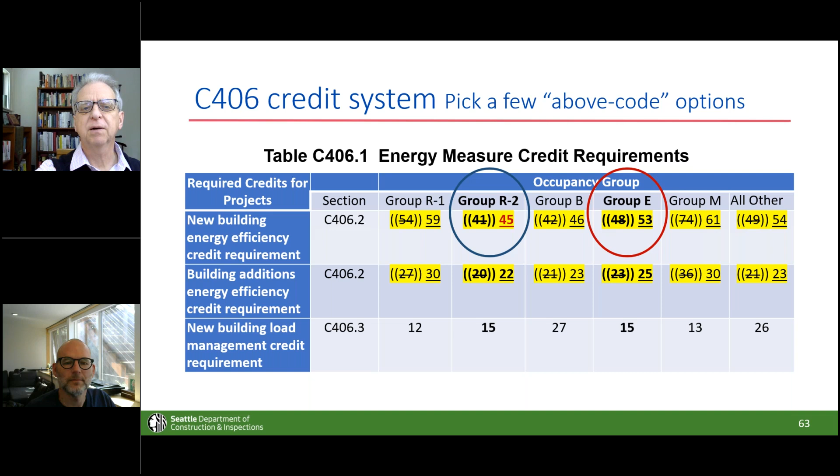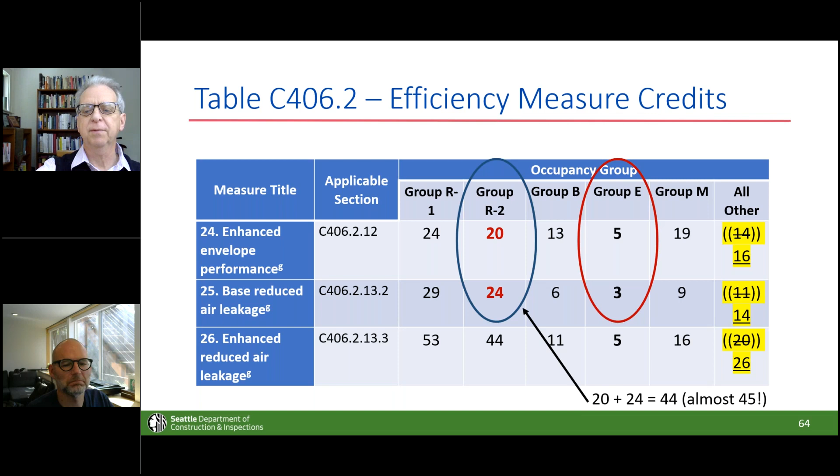There are 3 envelope-related credits, and if you just got 2 of them, that would get you 44 of the 45 credits you needed: reduced air leakage, which is not even the super duper reduced air leakage but it's some, and better envelope performance. You can see the top one there, that just says your total UA is 15% below the allowable.

For air leakage, the code says you have to have 68%, so basically you're reducing your air leakage by a third below that maximum. What you see in red in the middle is that you'd have to get it down to 0.14 CFM of air leakage. I've noticed a lot of curtain wall systems are already in that range because it's a very carefully engineered system. If you're careful with the loading dock, mechanical floor, and some other things, you might be able to get down there without much problem.

But just be aware, air leakage is one of those things that potentially could cost nothing, but be really clear that if you get to the end and don't hit the 0.14, you're going to have to come in and negotiate some kind of fix, which you don't want to do.

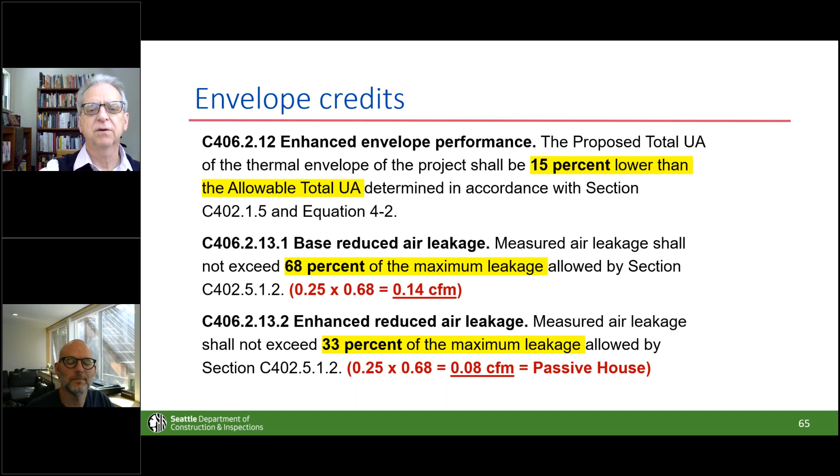Here's one thing for existing buildings I'm intrigued with. There are secondary systems where you can take an existing building with single pane or even double pane glass and put these additional things on the inside, or for some manufacturers on the outside of the existing glass. This was developed with PNNL and some national lab staff, and I was howling at them that it was going to have condensation problems, absolutely for sure. But it turns out that it doesn't.

In fact, they sent me an email a few months ago saying they did have a failure just now at one of their installations in Boise, and they're going out to see what happened. But they cleaned the glass, put some desiccant in the middle to handle changes in humidity, and it seems to be working. Look at the right for medium office.

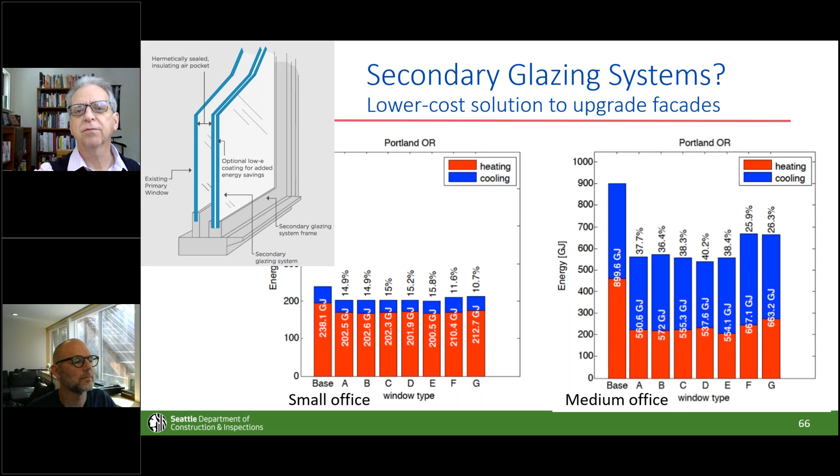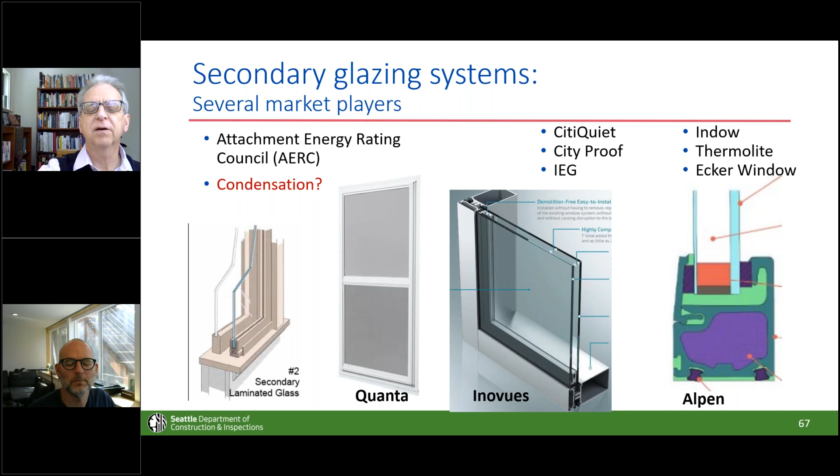There's a huge amount of energy savings possible for both heating and cooling, and for the small office, there's some savings for cooling but still substantial savings for heating by going with these systems. You don't have to rip out the entire window system or facade system. There are 4 different current players in the market with their own patented systems for doing this, at much less than half the cost of replacing the whole thing.

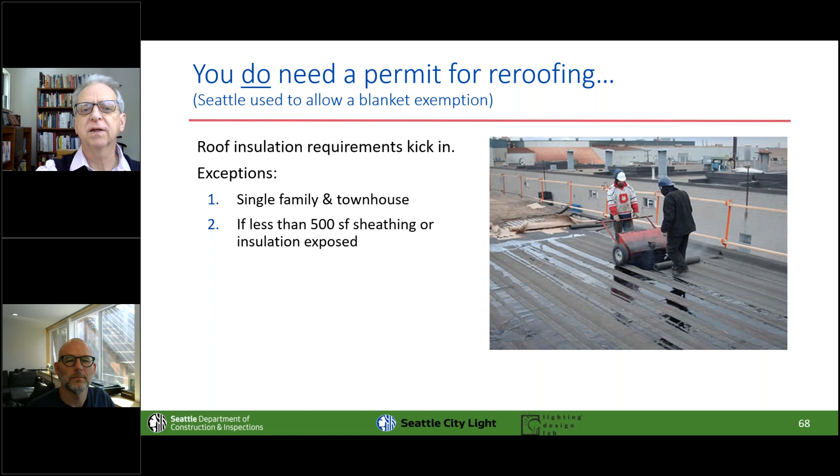Just want to mention that if you're re-roofing, you do need a permit. It used to be that you didn't, but the reason we require a permit is so we can make sure you do the roof insulation. You'll find that's not easy in a lot of situations because you've got a doorway out of your penthouse at the top of the stair, perimeter conditions, and mechanical equipment, and we just have to work things out with you on those. But be aware, in general if you're re-roofing, you're going to be adding insulation.

There are a few things you don't need to bring up to standard. If your local 10-year-old just knocked a ball through your window, you don't have to bring that up to code, you can just replace it like for like. If you open up a cavity in the wall or ceiling, you don't have to bring it up to code, you just have to fill that cavity. If you replace a door, you don't have to put in a new vestibule - that's saying if you replace a door with another door in the same opening.

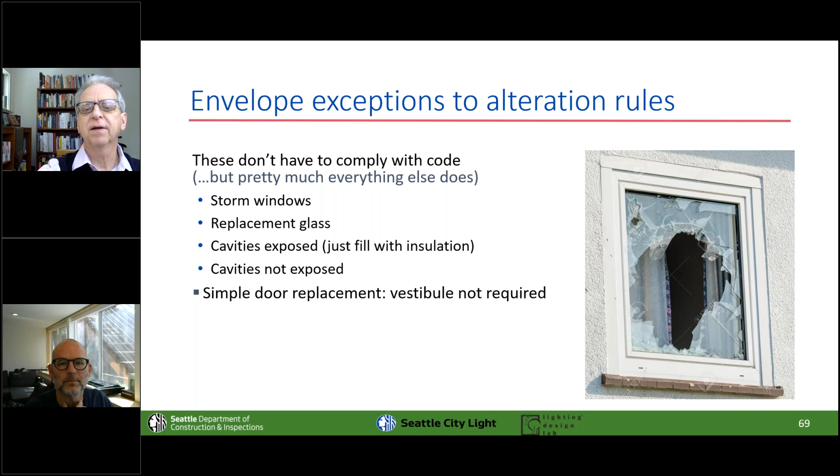For alterations, air barrier testing is typically not required, and the reason is that it doesn't make a lot of sense for most alterations. But those big 3 - change of occupancy, change of space conditioning, or in Seattle substantial alterations - are, like I said earlier, where we're treating buildings as though they were new buildings, then backing off slightly. Those you're going to have to go in and tighten up the building. Another great opportunity to hire one of our specialist firms in Seattle.

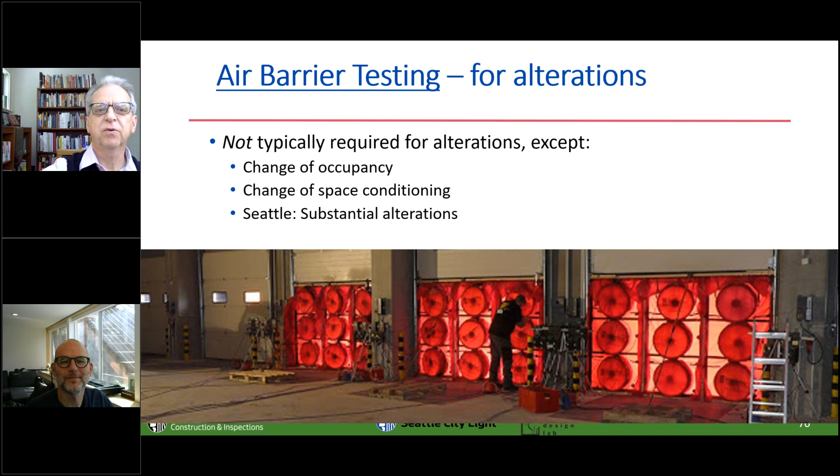So finally, I had this slide up last time - even though we've reduced energy use in Washington State by 40% already, which is great, to get to our 70% reduction target in state law, that still required half. That 2021 code looks like it will come in right around where those dashed lines are. So we've done a chunk of that, you can celebrate that, and you can see that as we get to those last parts it's going to get progressively more difficult to find things. But it seems like every code cycle we've been finding things, and we very well might just hit that target on target.

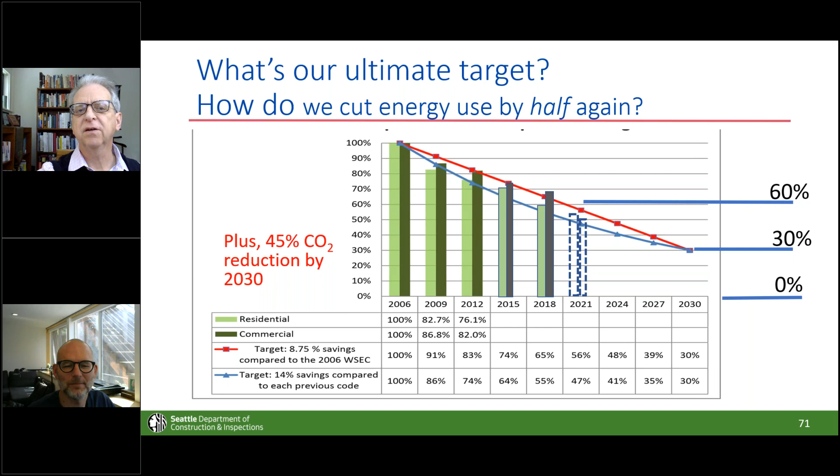There is more to life than energy efficiency. If we can use this opportunity, when we're meeting these code challenges, to make sure you have better sunlight and more comfort close to windows, less emissions, and systems that last a long time and look good, that helps ensure the credibility of the whole energy efficiency effort and makes sure we're using the change to take care of the humans in and around our buildings.

Nick, did you have any last words before we go on to the business part here? No, I think this last one is the most important. It's definitely a yes, and we're finding that increased energy performance actually comes with better comfort for people inside the buildings. So you can make beautiful, energy efficient buildings, and everything can be better.